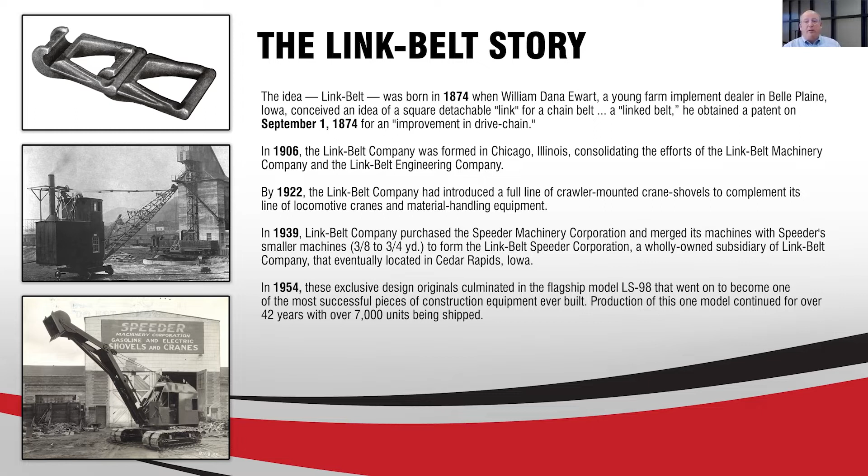But you go to 1962, it's a pretty important date. In '62, Link Belt, headquartered then in Cedar Rapids, Iowa, from Chicago, said, we can't build and ship cranes to the Far East and be competitive. So they sought out a friendly suitor, Sumitomo Heavy Industries in the Far East, a heavy manufacturer, one of the very large companies in Japan, already building ships and some other construction equipment. They signed a marketing engineering agreement: build the Link Belt 98 here in your part of the world, you take care of the Far East, and when you ship one, send us a royalty. And thus the relationship with Link Belt and Sumitomo was forged way back in '62.

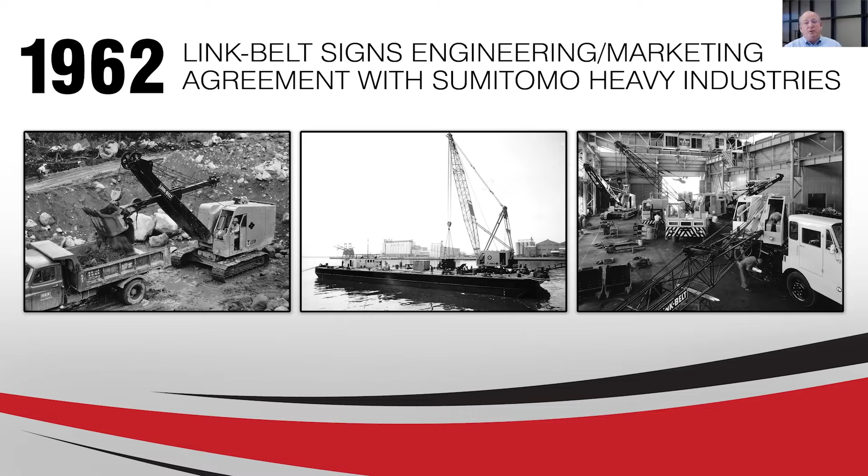That set that - that was for their market. Then in '67, FMC Corporation, a huge conglomerate out of Chicago, bought Link Belt Company lock, stock and barrel, and spun off the construction equipment, the crane part, to form the construction equipment group of FMC. FMC poured a ton of money into the business. We'd already had a plant in Woodstock, Ontario, but they put plants in Milano, Italy, Querétaro, Mexico, Sao Paulo, Brazil, and in '74 came down here, and in '75 opened two plants in Kentucky. It was a huge expansion time for Link Belt, FMC Link Belt.

In 1986, FMC saw that the business was not going to be what it was once planned to be. The construction equipment business was not going to need the capacity they had, so they were going to downsize, and then decided to get out of the whole goods business altogether and sold Link Belt Cranes to that company from '62, Sumitomo. Sumitomo saw the value of Link Belt - we had grown into a good partner, and they bought the Link Belt Construction Equipment Group entirely from FMC.

And ever since then, Sumitomo's basically been our owner, and a good owner they have been. We always say, we don't have to meet quarterly stock meetings or public releases of information. Our owners think in terms of decades - what's good for us for the next 10 years, not the next 10 months. That's really a great way to operate, and makes for a very solid team.

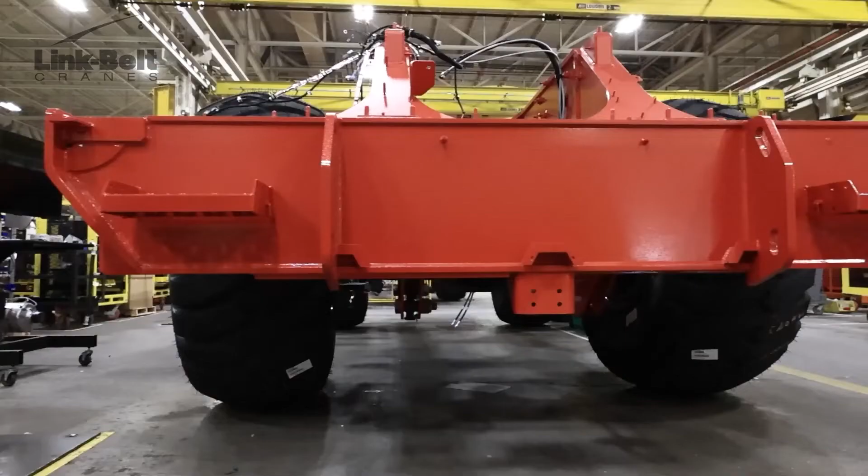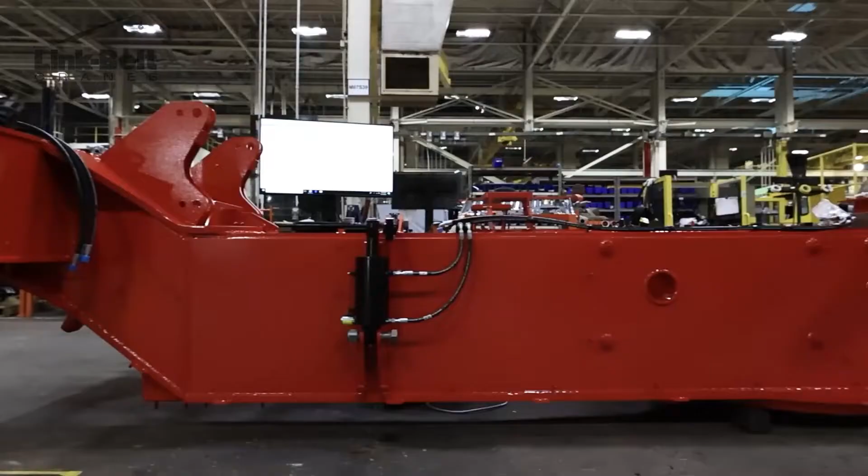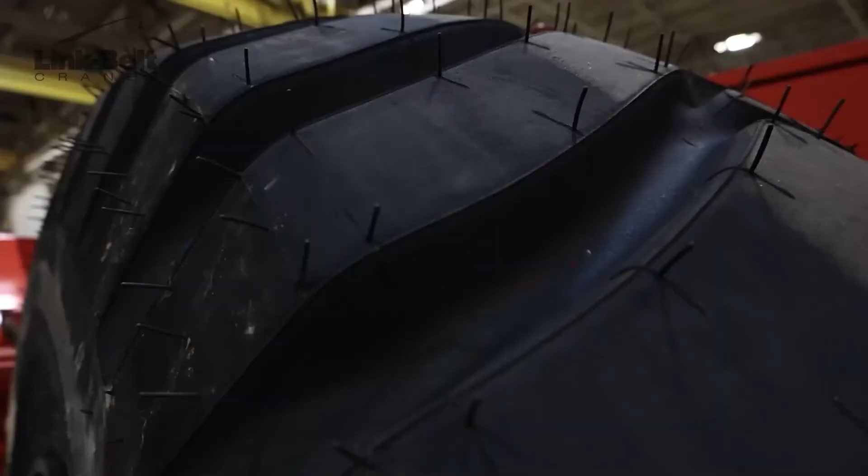We currently offer 7 different models, and 5 of our models are built right here in Bay 7 at our manufacturing facility in Lexington, Kentucky. We incorporate a lot of different safety features, simplicity, and serviceability features in all of our rough terrain cranes. I'm walking through Bay 7, where we manufacture capacities from 65 ton up to 120 ton, primarily rough terrains with 4 wheels. As we walk through the facility, you'll kind of see our generic process where our cranes are going to come in upside down. We're going to put in all of our hydraulics, our electrical, axles, wheels, and then we'll sub everything else up that's going to go into the carrier itself.

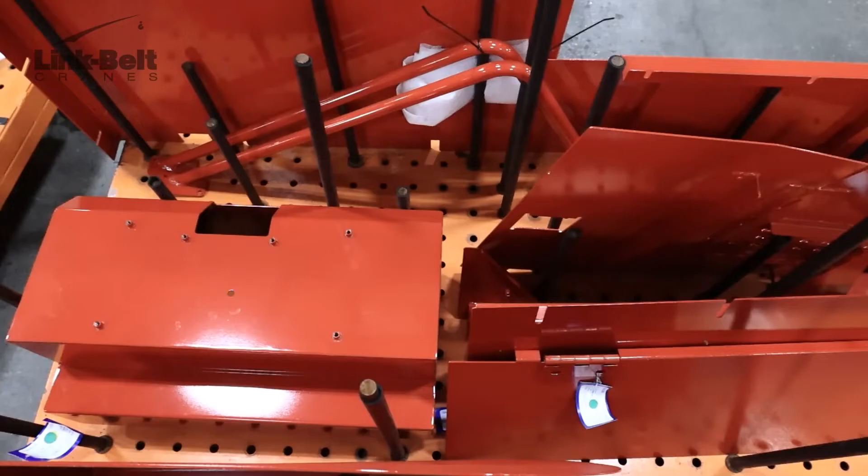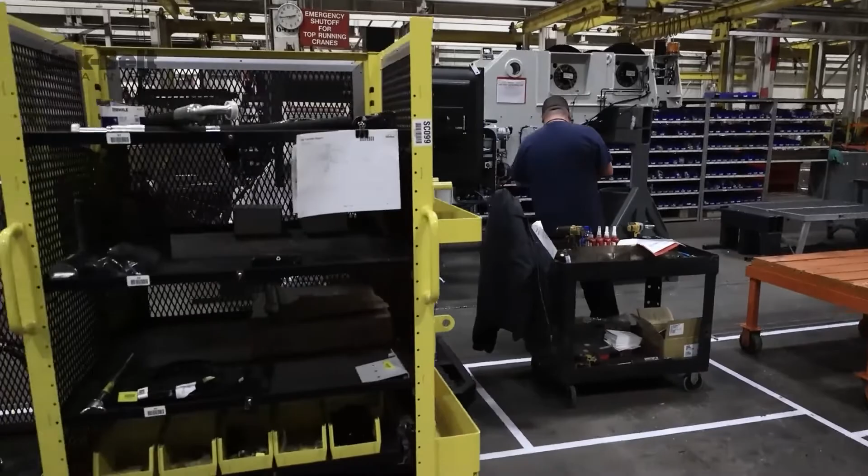Here's where we're subframing up an engine. We'll also sub up our transmissions, our tanks. Here in cell 4 is where we're going to do all of our sheet metal, where we're putting in our ladders, our grab handles, our slip-resistant fenders. We'll continue through our process where we'll take our upper frames, and we'll add in all of our CAN bus systems, our electrical, our winch packages, our lights. All of that will be staged up and be ready for a mounted operator's cab. Once that operator's cab is complete, we'll take it, we'll deck it on the crane itself, prep it up for startup, and then pull it over to get ready to put our booms on it and then take them out to the test pad.

As we continue down our tour here of Bay 7, we're coming across a 100 RT. Now we build 5 models again in this bay, and they're all built pretty much the same way, we just use different components. So we build a 65, a 75, 100, and a 120, and most recently we announced a new 85 RT.

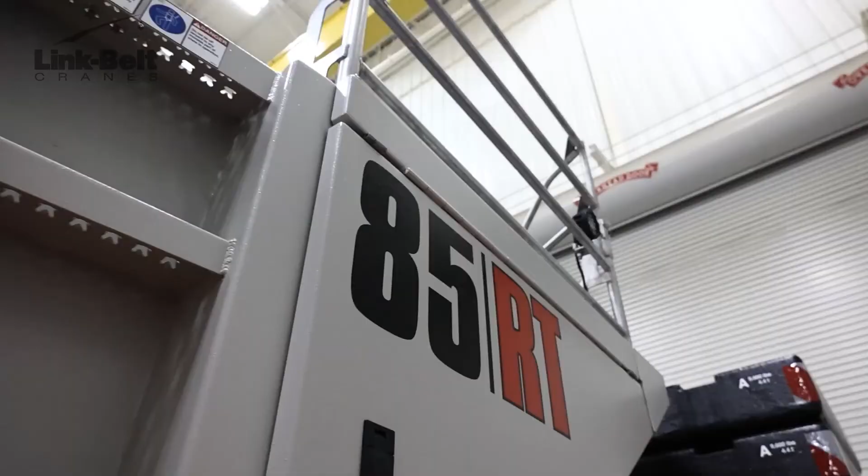Here we're in our final stages of our production process on the 85RT. This crane has had the carrier finished, the upper complete. We've mounted the cab, put it on the boom, and now it's sent it through final paint. These gentlemen are doing its final safety inspections and quality inspections before releasing it to our shipping pad for transport. Now, speaking of transport, our newly designed 85RT will now transport at 105,000 pounds when fully equipped. If we remove our counterweight, we can transport it down to 86,000 pounds, making it one of the most versatile rough terrain cranes on the market.

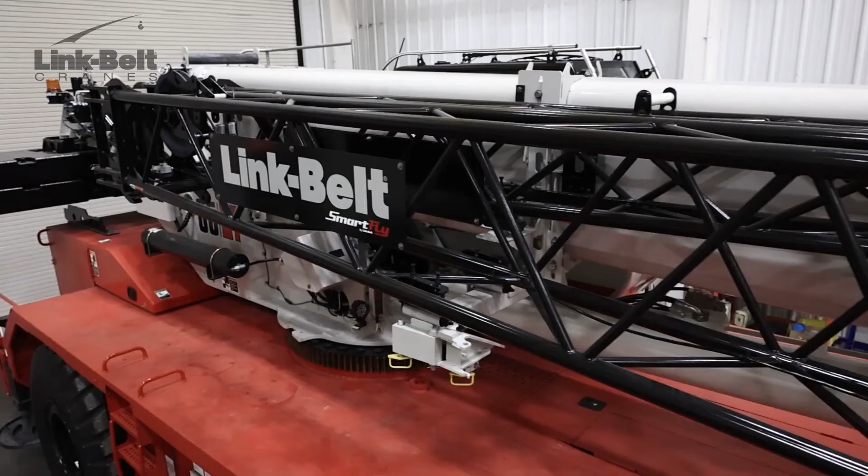The 85RT offers something for everyone. So whether you're a crane rental house in BC or a general contractor in Ontario, this crane offers versatility across the board.

Hello SC&RA members, I'm Andrew Soper. I'm product manager for on-highway product at Link-Belt Cranes. I cover all-terrain cranes, hydraulic truck cranes, and today I'm going to walk you through what we call Bay 14. This is our dedicated production bay for all-terrain cranes. If you didn't know, we've been producing Link-Belt ATs in Lexington since 2012 with the introduction of the ATC 3275. We have 3 models in the product line: the 275 ton, the ATC 3210, and the new 175 AT.

I'm going to walk you through how our process works here, and how we get from piece parts and sub-assemblies to a main finished crane.

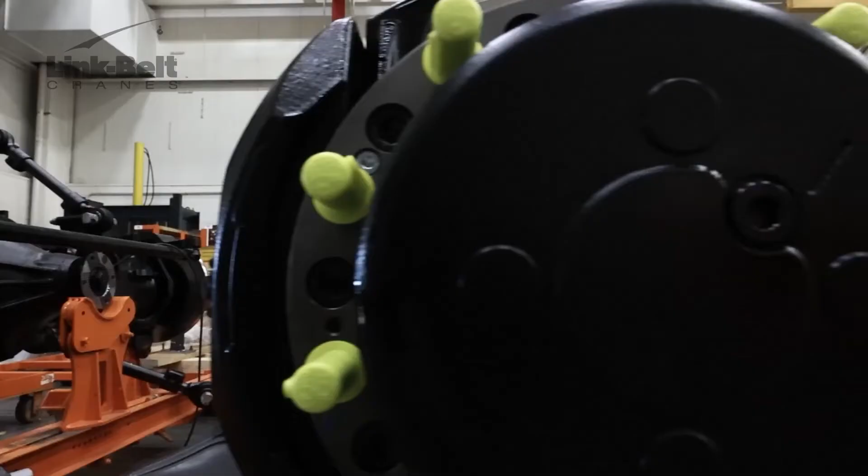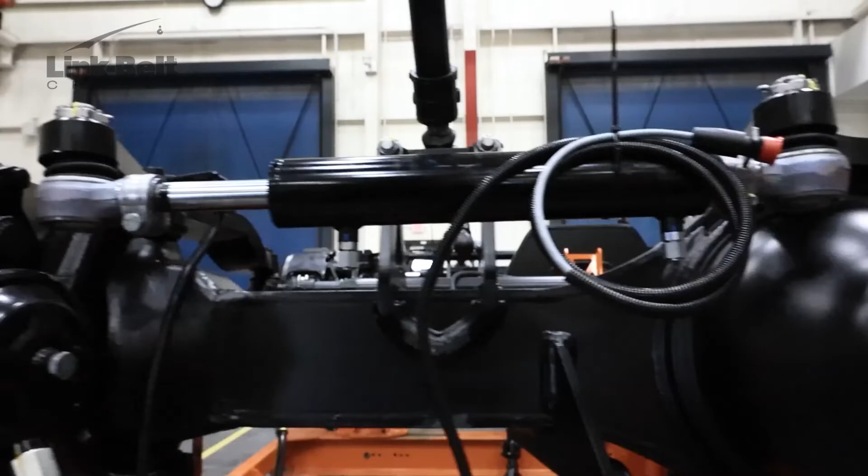On the left-hand side of the bay, we're doing some of our major sub-assemblies. You can see the axles going together here. These are axles for a 3275, Kessler axles. We have these models in 10x6. Our 175 AT is a 10x8 system.

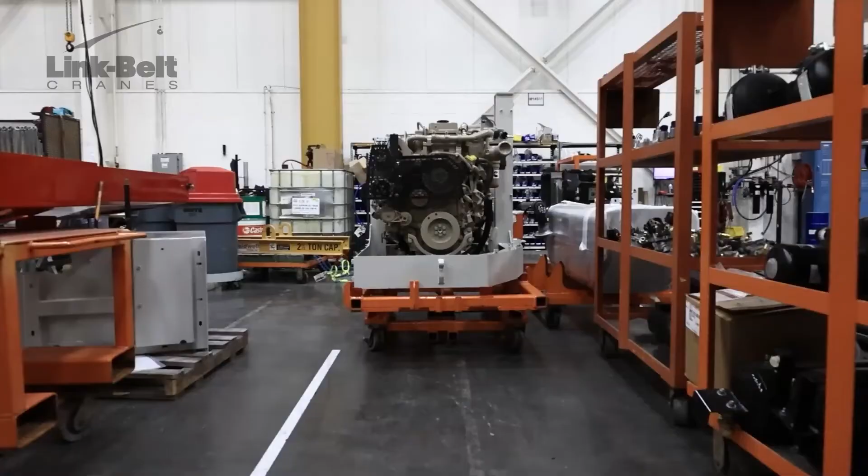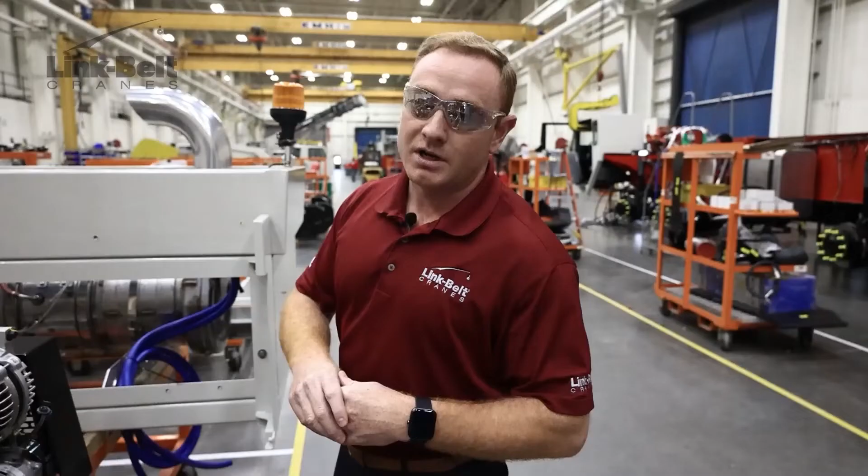We're also doing engine sub-assemblies, engine transmission, engine powertrain. Here you can see an upper engine for an ATC 3275. This is a QSB Tier 4 Final off-highway engine from Cummins. Like the rest of the Link-Belt product, we are Cummins power across the board. Cummins has one of the best service support networks in the engine business, so we're very proud to have them as a partner.

We have two different platforms for our all-terrain cranes. We have a two-engine platform with our 210 and 275. We have a single-engine platform with the new 175 AT. So we've got that going.

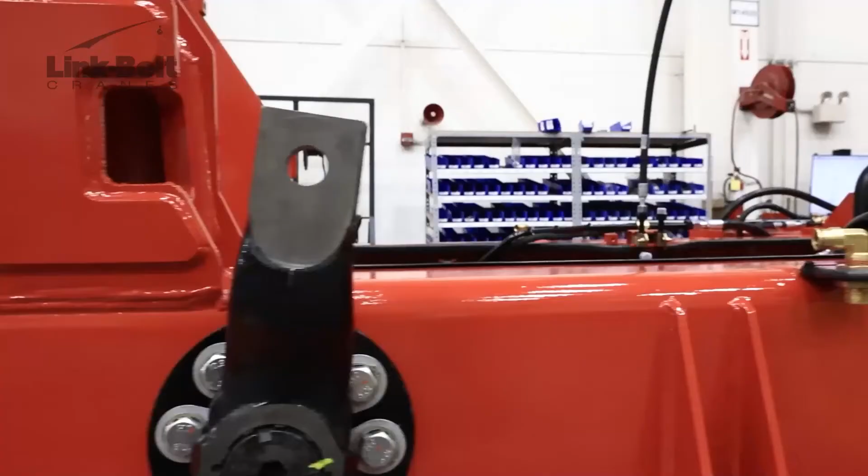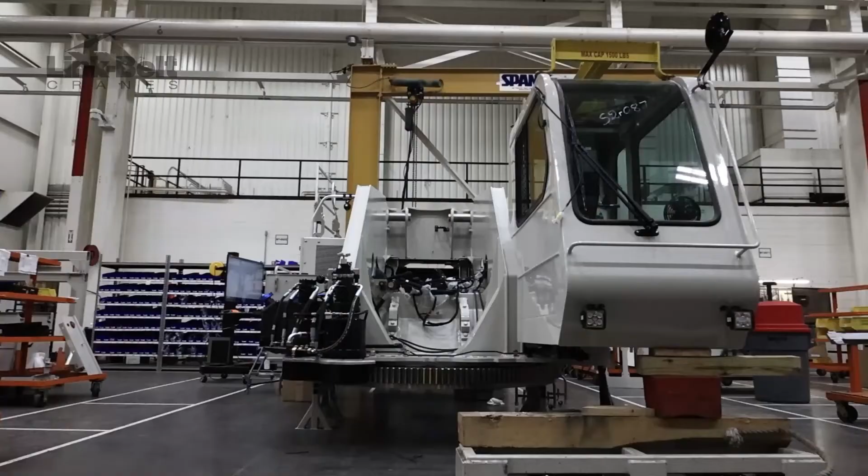On the right-hand side of our bay, you see the carrier frame of an ATC 3210. Your chassis continue down the right-hand side of the bay. On the left-hand side, we have our upper assemblies being stall built. They'll build the entire upper assembly from the turntable bearing up - bearing, upper frame, hydraulics, winch, engine if it has it, upper cab. He's installing the upper cab and main upper wire harness now. So we've got one machine about 75% complete here.

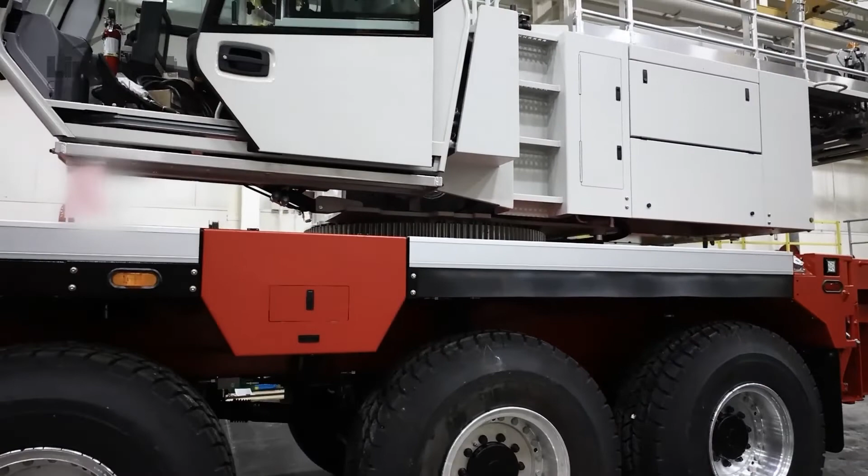This is a 175 AT, our newest model, a single engine platform like I said. It's got all the bells and whistles of any all-terrain crane on the market. Some of the new stuff we've introduced and innovated on is tire pressure and temperature monitoring, which comes as a standard feature, and real-time ground-bearing pressure on your outrigger jacks and beams.

We also introduced this new dual occupancy carrier cab. It's got all the creature comforts that any over-the-road truck's going to have, or some that you're going to find in your commercial vehicle.

Okay, SC&RA members, you've seen our ATC product. Now I'm going to show you what we're best known for - that's our hydraulic truck cranes.

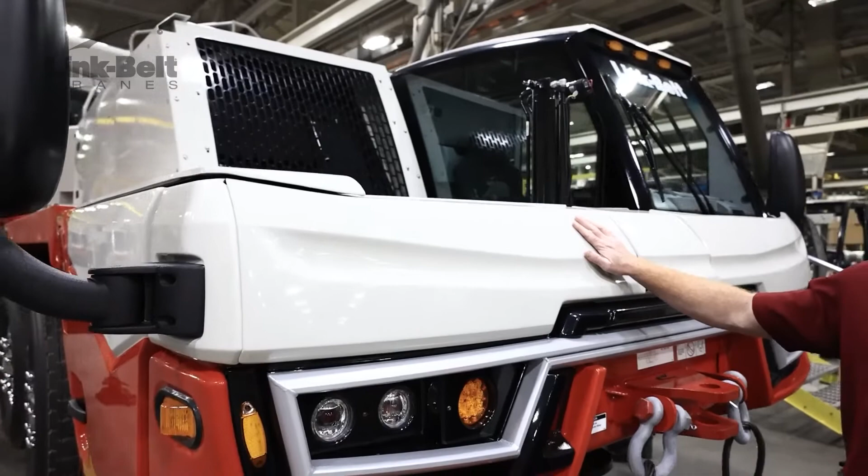This is the newest model in the fleet. We just introduced it at Crane Fest 21. This is the 120 HT, a totally redesigned truck crane from the ground up. It's got an all-new carrier frame, all new suspension, axles, everything.

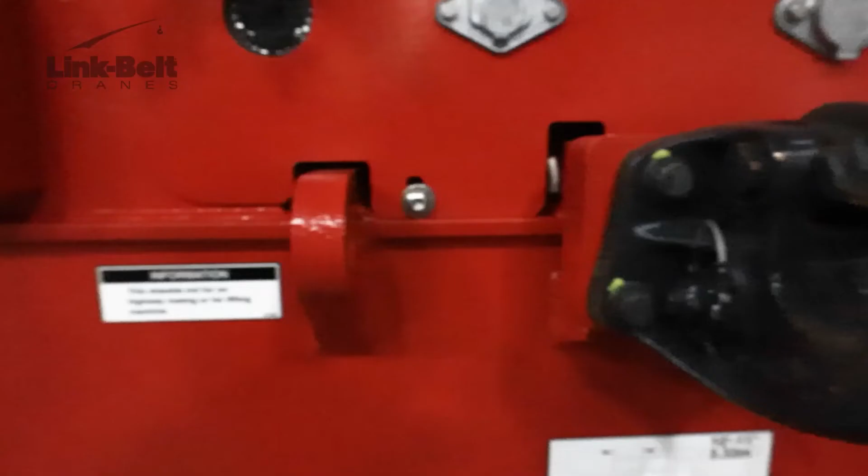It's got some of the bells and whistles that you're going to get with your ATCs, like tire pressure and temperature monitoring. You get V-Calc along with the Pulse 2.0. This vehicle is going to transport efficiently in a boom-over-the-front configuration, where you can carry up to 20,000 pounds of counterweight. It's also going to transport efficiently in dolly, where you can carry up to 36,000 pounds of counterweight.

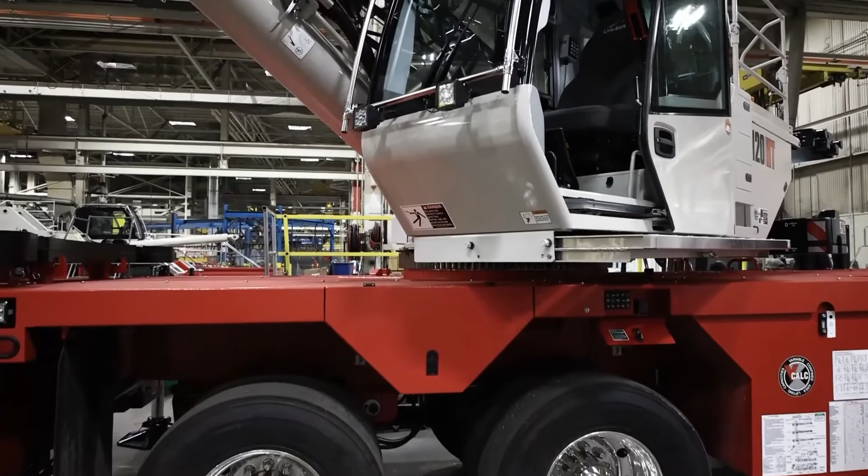In a lot of applications, there's a long drive time, and then the operator's got to get out of the chassis and into the upper to operate the crane. So we try to minimize driver fatigue by making it a comfortable ride. You've got an air ride seat, air ride mounted cab, lumbar support in the cabs as well for the operator's seat. It's all about comfort for the operator.

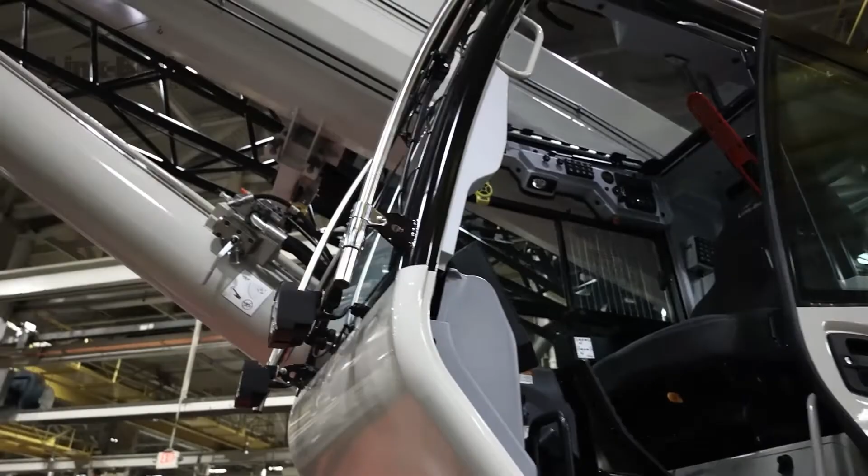To recap the new features on the 120 HT: you've got a new carrier cab, new suspension, new axles with higher rating, and improved ride quality. On the upper, you've got the SmartFly, the patented Link-Belt SmartFly, integrated on here. You have a new operator's cab with Pulse 2.0, and our counterweight detection system, what we call our Smart Stack system.

We're going to walk down the rest of Bay 8 here. This is where we produce our truck cranes. On my left hand, you have an HTC 86-100, still going strong for Link-Belt, very popular crane. On the right-hand side, we have an HTC 86-75 Series 2. It's been around about 15 years, very, very popular crane for us.

And then here, this is a T2, the HTC 86-110. We introduced this crane at Crane Fest 2015. It's been the market-leading truck crane since its introduction at that time frame.

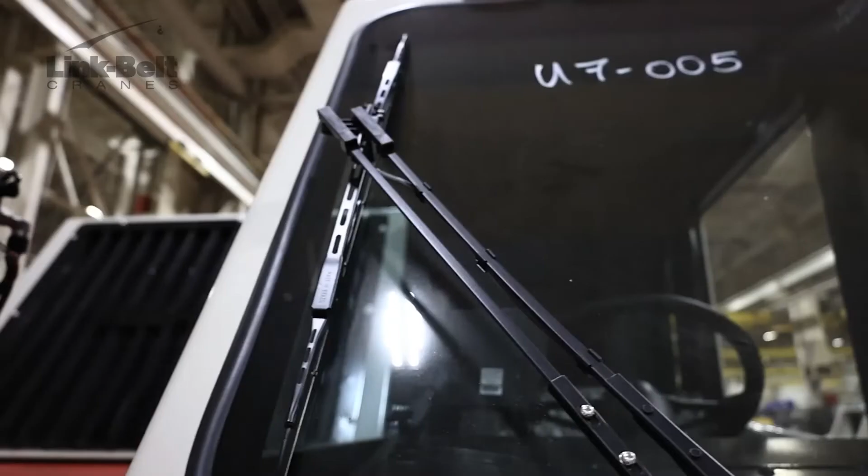This is the 65 HT. This is about halfway through production - this is the chassis, built up waiting for an upper. This is the replacement model to the HTC 8660 Series 2. We've put a longer formed boom attachment on it. It's got improved capacities, increased counterweight payload, higher maximum counterweight, and an improved chart relative to its predecessor.

That's our on-highway product for you. Thanks for coming along.

Hello, I'm Kelly Feaster, product manager for telescopic crawlers and lattice cranes here at Link Belt. And I'm here in Bay 9, which is our telescopic crawler bay. We're going to talk a little bit about the product line and what's going on here in the bay today.

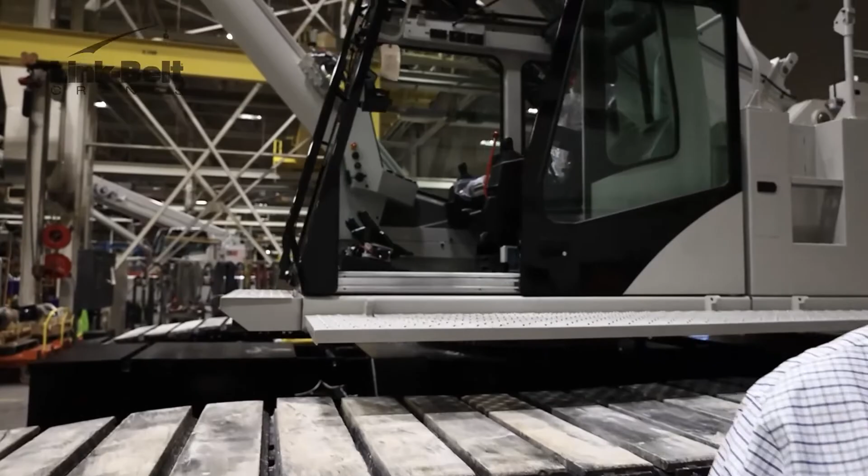This crane behind me is our TCC 800, or 80-ton telescopic crawler crane. This TCC 800 has 120 feet of full power boom, moves in basically 2 loads, goes together, completely self-assembles, goes together very quickly. Off the truck to operating time is very quick.

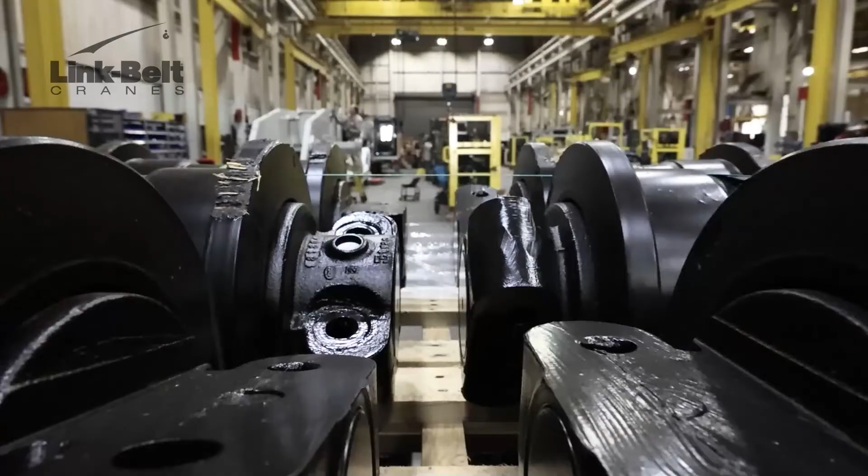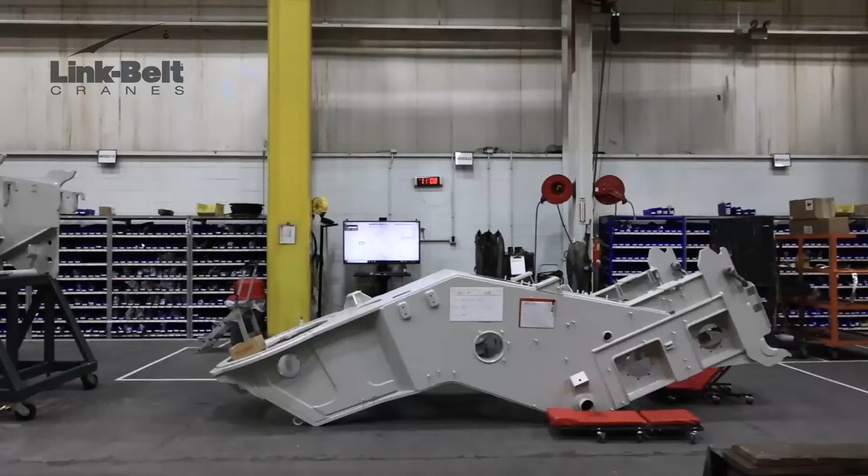Okay, so we're here in the center of Bay 9 where the telescopic crawler cranes are built. Today our product line goes from the TCC 550 at 55 tons all the way up to our TCC 2500 at 250 tons. As we walk through the bay, you can see a difference between this bay and what you saw with the rough terrain crane bay and the truck bay, in that these pieces are more stall built as opposed to moving down a traditional assembly line.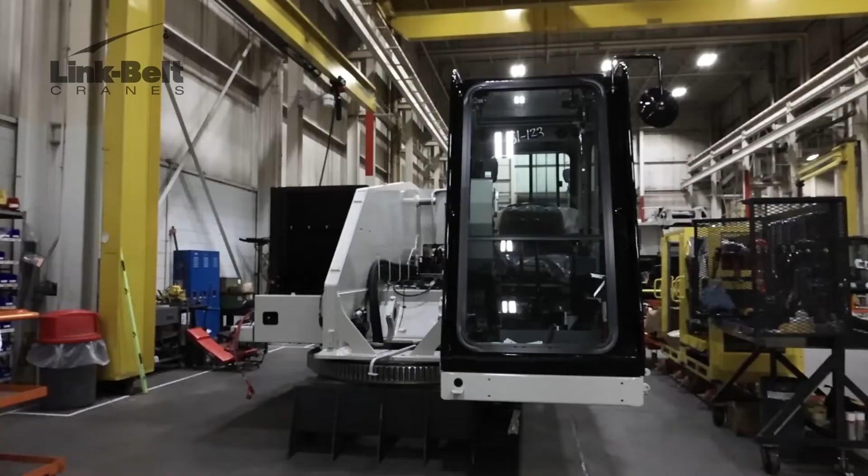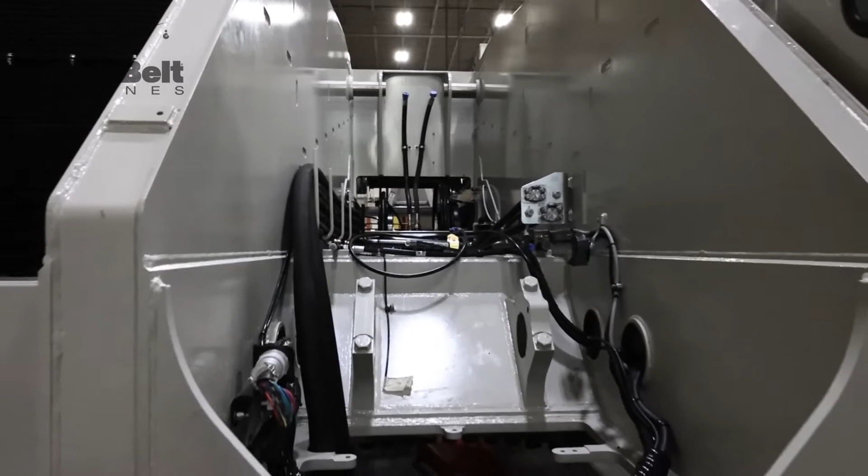So we're looking at the upper for a TCC 1200 here. It comes in, gets turned upside down. They do all the lower componentry first, just like with the other bays, and then they'll pick it up with the overhead crane and fly it over to where the lower is already being assembled, and assemble it there at the location of the lower.

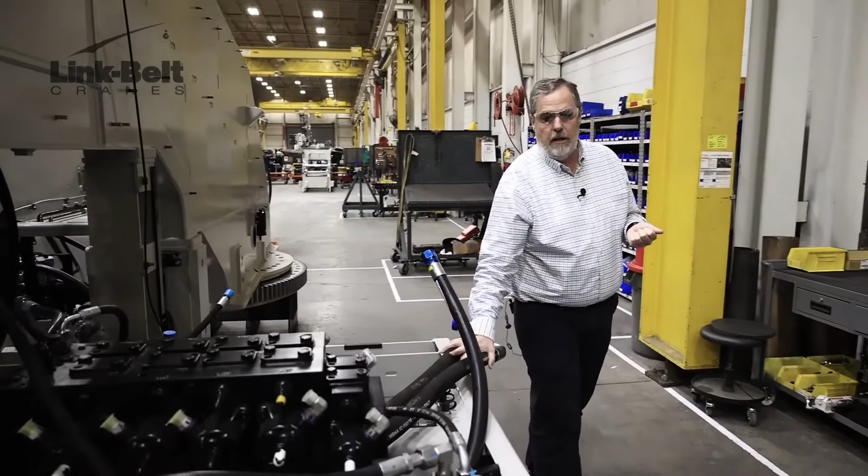Please notice everything is finished painted. We pre-paint everything on these cranes just like we do with the rough terrains and the trucks. We use hard hose everywhere we possibly can, unless there's something that causes vibration, and then we have to use a flex hose to limit vibration.

As we move on down through here, we see some other componentry sitting around, piece parts for the next build, but the thing I want to show you is just ahead of us, and that is the next TCC 2500 being built. This crane, as you can see, is a step ahead of what we just saw with the 1200. The lower is finished, the lower componentry is done, the upper componentry is done.

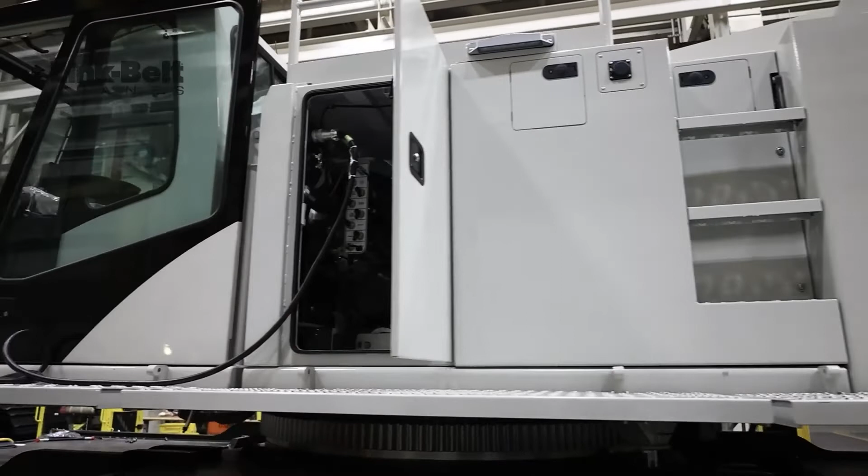This crane has been decked. The car body counterweight has been installed on this crane. You see with the 2500 we have hook and pin side frames just like we do with our large lattice crawler cranes. The 298, the 348 all have hook and pin side frames that work exactly the same as the TCC 2500. So this crane is in a condition to where it's ready to accept its boom.

We're getting ready to boom this crane. The side frames, the crawler frames are finished, and they're ready to be installed, and that'll be the next step for this crane.

Okay, so here we are at the beginning of the lattice bay. This is where we manufacture and assemble our lattice for all of our crawler cranes in the product line today. These racks behind me house the lattice and the chord tubing that we use to make the boom sections.

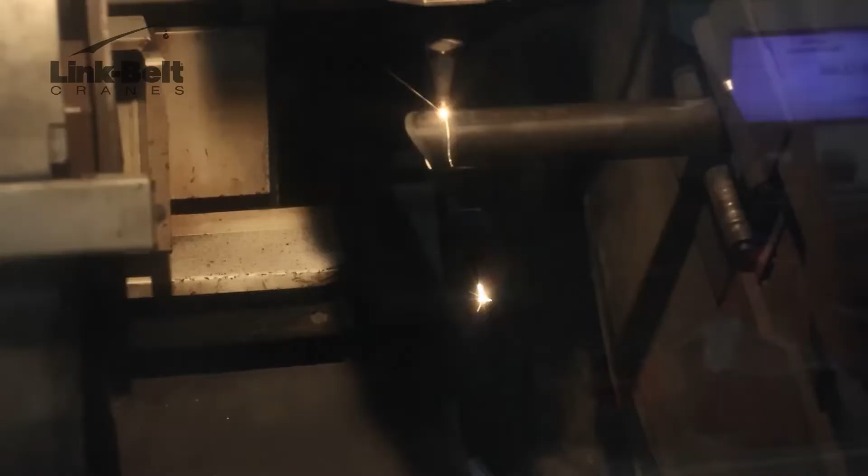As we move forward, we use a laser to cut our tubing for our lattice, and you can see how it cuts the tube at an angle. So it cuts the lattice at the right angle, and it copes the lattice perfectly. So when we actually assemble the lattice onto the chord tube, there's no cleanup necessary. We can just put it on and weld it in position.

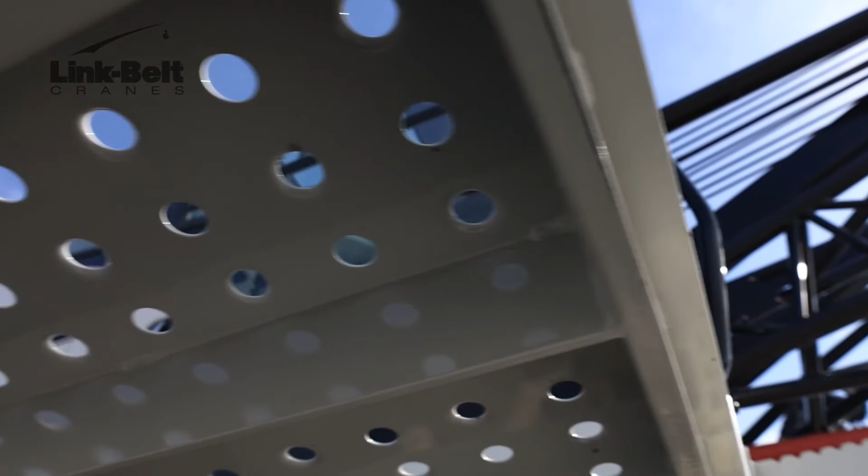Here we are out on the shipping pad at Link-Belt. It just so happens that we have a 218 HSL here that's getting ready to ship out to the customer. We wanted to take this time to talk about our lattice product line. Some things about the product line you may not know: we import the uppers and the lowers from our sister company HSC, and we build all of the lattice boom and the live masts here. The other thing about these cranes is they are all Cummins powered cranes, and those are North American sourced Cummins.

We talk about the product line today. We go from 80 tons with our 138 HSL all the way up to 300 tons with our 348 Series 2. And this crane, the 218, is 110 tons. Great thing about these cranes, they transport best in class as far as transportation.

Self-assembly, they're all designed to self-assemble. This crane here, as far as serviceability, the lower is sealed. There's grease zerks on the turntable. The head machinery is all sealed, the bridle and the bail sealed, so very little daily maintenance for these cranes. So the cranes can go to work and go from shift to shift with very little downtime due to maintenance. That goes for the whole of the lattice product line.

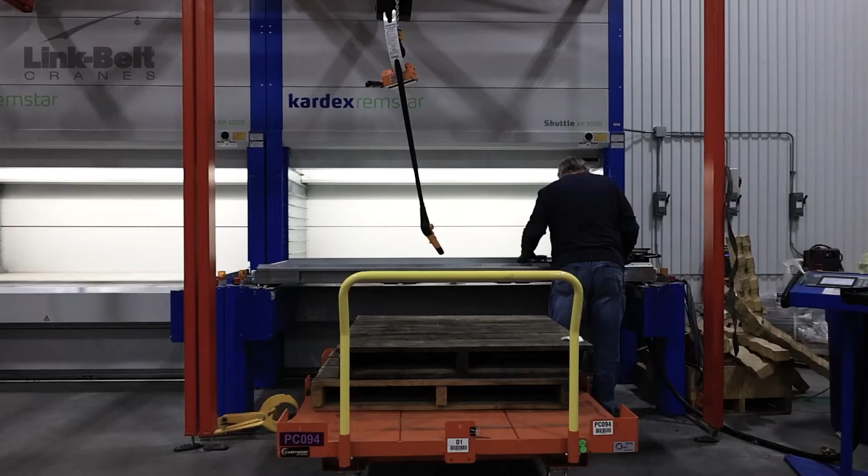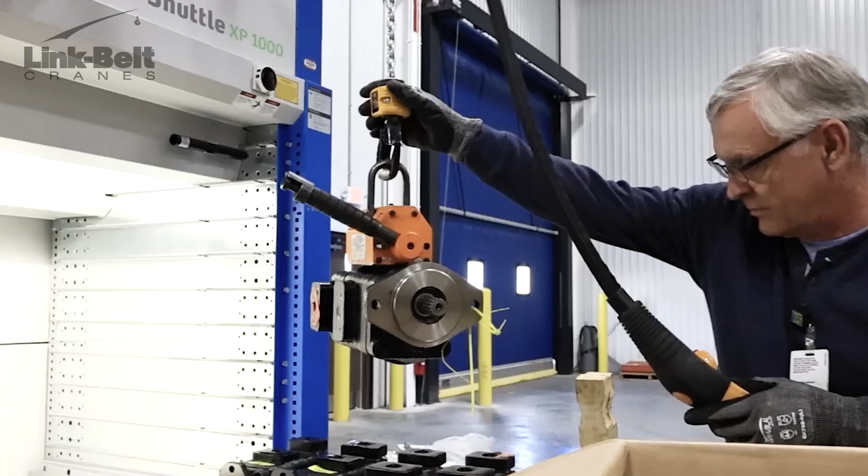This distribution center was opened in '94, and we separated our group into a separate parts center so we could control our orders and our inventory better. All of the orders come in online from our distributors, and then we process them. They go out into the warehouse where they are picked, packed, and pulled and shipped to our customers all over the world.

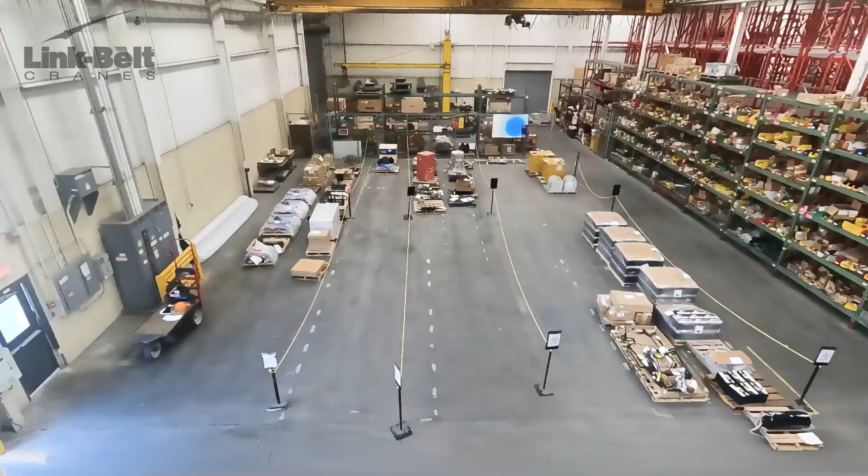So in 2020, we made the decision we were going to expand our warehouse. Right after ConExpo, we broke ground on a brand new warehouse that will house all of our production parts. In the meantime, we also changed how we did things in the existing warehouse. One of the first things we did was consolidate all of our receiving into these 3 doors. Now everything that comes in, whether it's for production or service parts, comes through these 3 doors. They're then brought over to locating lanes where they're located throughout our warehouse depending on whether they're going to production or service parts to be shipped out to our customers.

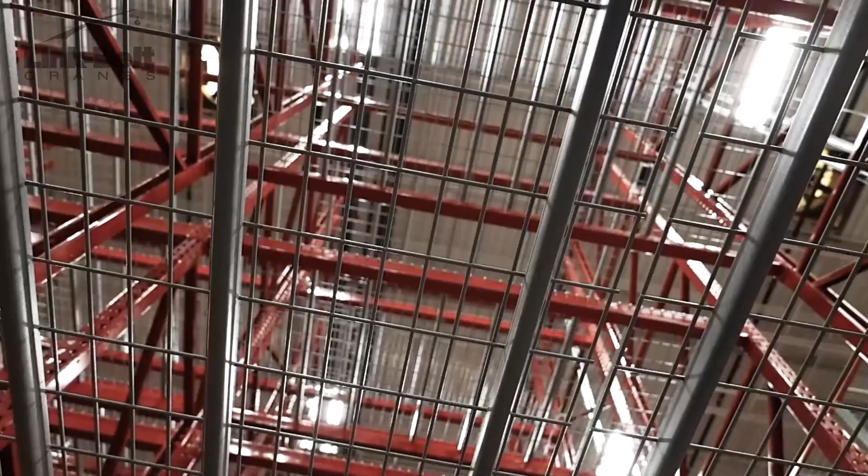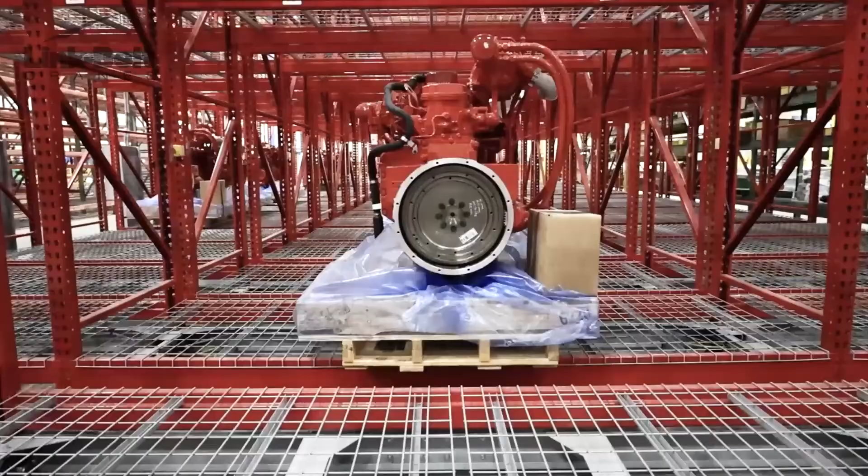One of the things we did was remove our old stationary racks, and we've installed these new safe racks which travel along tracks and more than triple our rack capacity in this area of our warehouse.

All of the service parts have been consolidated down to this end of the warehouse in these racks, so it goes right from the racks straight to the service parts shipping area. We have our wood shop down there where we can build any crate, and then we've got our UPS workstations and our FedEx workstations so that everything small pack can be shipped out of here.

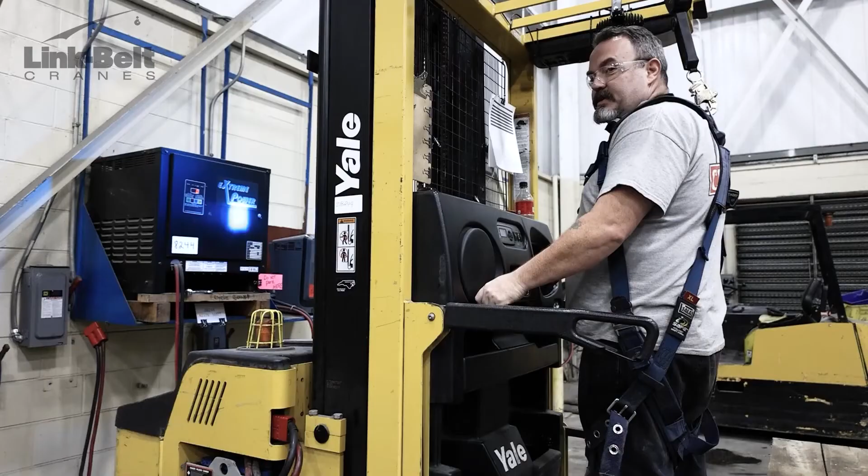Here you can see the charging stations for one of our electronic pickers. These pickers then go between all of the aisles, and they take each shop order or each service order, go through the aisles, pick out the parts, and get them ready for shipment. So now we're going to walk into one of the entrances into the new warehouse.

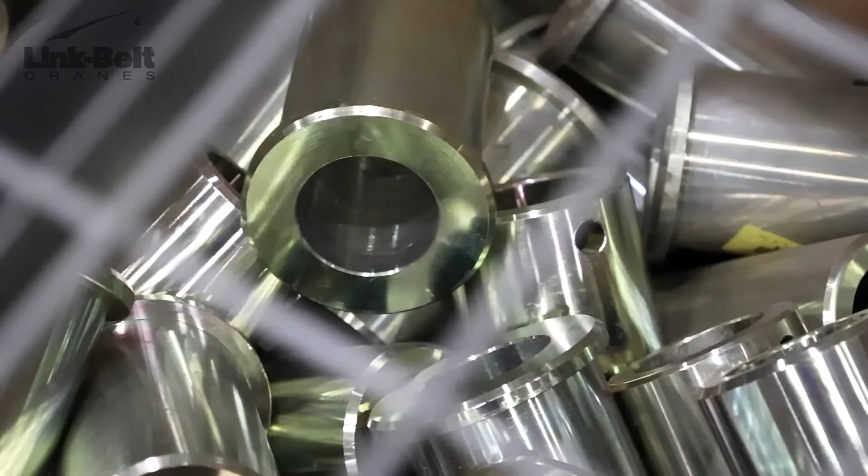We've got our new racking system for all of our cylinders. All of our boom hoist and telescope cylinders will be stored on these racks. We've also got all of the new parts storage for the hoses and the tubes. We have 15,000 square feet of storage for hoses, and 140,000 square feet of rack space in here.

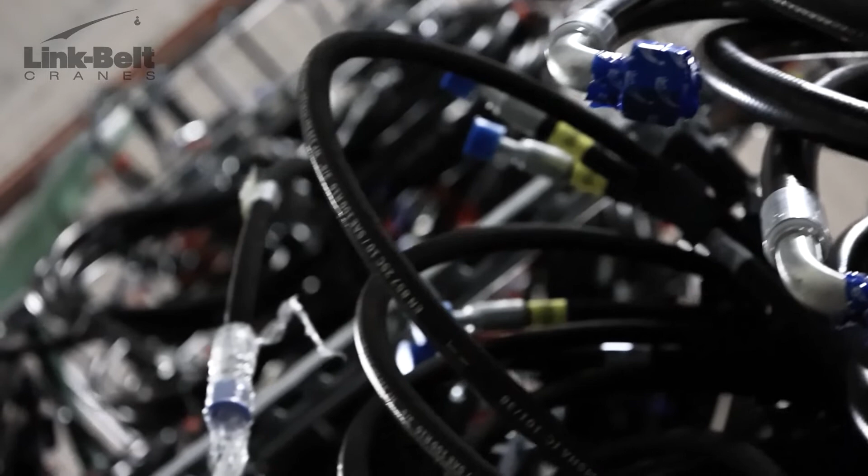We've got all of the hoses and tubes on this side of the warehouse because these are the first components we'd need to assemble onto the machines. They're located so that as we go to assemble the machines, we'll work our way down the warehouse into the larger components. As you walk through here, you can see the tubing comes in all different shapes and sizes, and we've got these custom racks built for us to store all of these tubes.

We've got two identical Kardex machines. This one in the new warehouse will hold 14,000 square feet of parts, and the one in the old warehouse will hold 14,000 square feet of parts. You can see the parts have been brought over from the locating lanes. They've got the yellow tags on them, the barcodes, and then they're brought over and put into the Kardex.

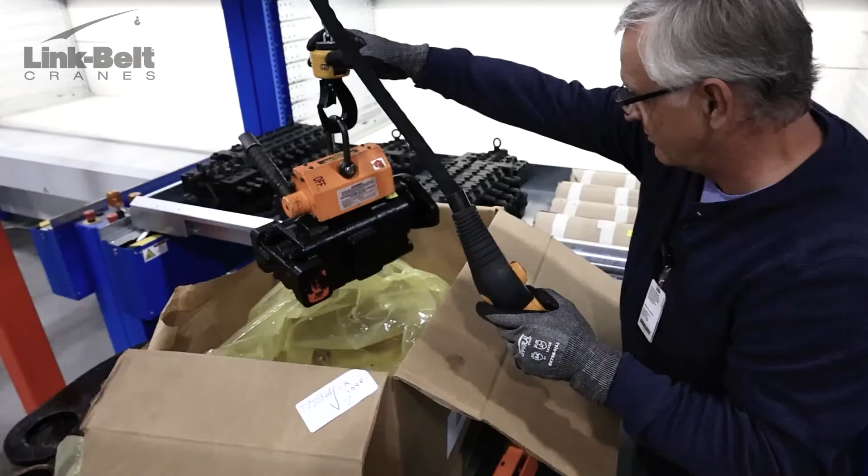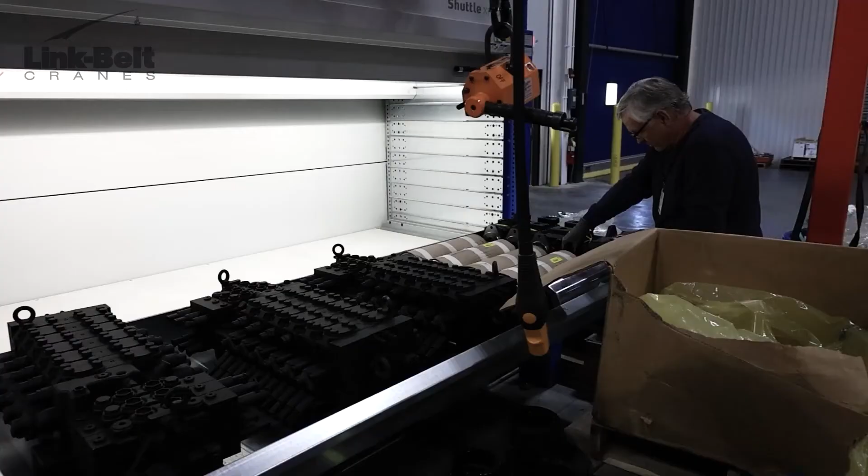Now the difference with this Kardex is it also has two heavy trays. Normally in a Kardex you'd only be able to put very small and light parts, but this Kardex will hold, each tray will hold up to 2,200 pounds, which is a metric ton.

So as you've seen throughout this warehouse expansion, we've made a large capital investment to ensure our customers have the best service and support that we can possibly give them. We understand that getting our customers up and running in a timely manner is critical to their bottom lines. And Link-Belt wants to do everything we can to be at the forefront of the industry to make sure we are the leader in service and support.

Thanks, Troy. I just recall that puts us at 132,000 total warehouse space out there for product support parts. So thank you very much.

So we talked about the product, we talked about the support side. Gary told you about service reps available to support our dealers, the parts we use to support our distribution. Now I'll take you to another side of the business, which is a big and growing part. That encompasses what we call Preferred, which is for crane owners as far as access to our e-library and all the tools available through our internet services. So I'm going to introduce you to Bruce Cablin, who manages that for us. Hi Bruce, take it away.

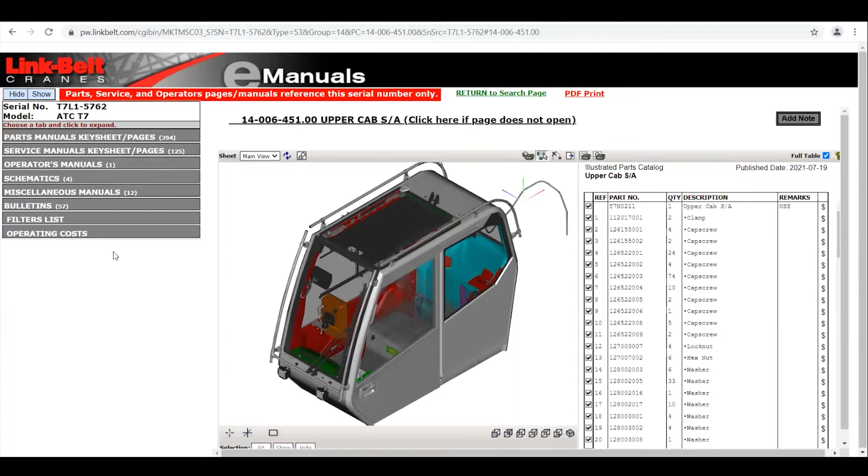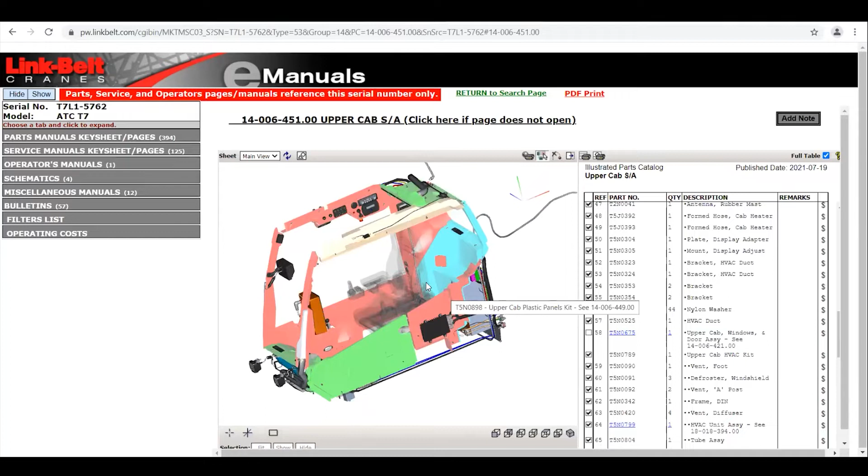One of the things that we've improved on in the past probably 10 years is this 3D rendering that you're seeing right now. So now all of our newer cranes have this 3D representation of a parts page. That's pretty cool. And then the cooler part of this is I can scroll down and I can actually take that door off. And now you see the internal components of that crane. And then when I'm hovering over a particular part, these are getting highlighted as far as what that part is. We could go into a lot more detail if I had more time to do that. Obviously, I don't today. But we think a lot of the aeronautics industry uses this. We're probably the only crane company that gets to this kind of detail with 3D rendering on our parts pages.

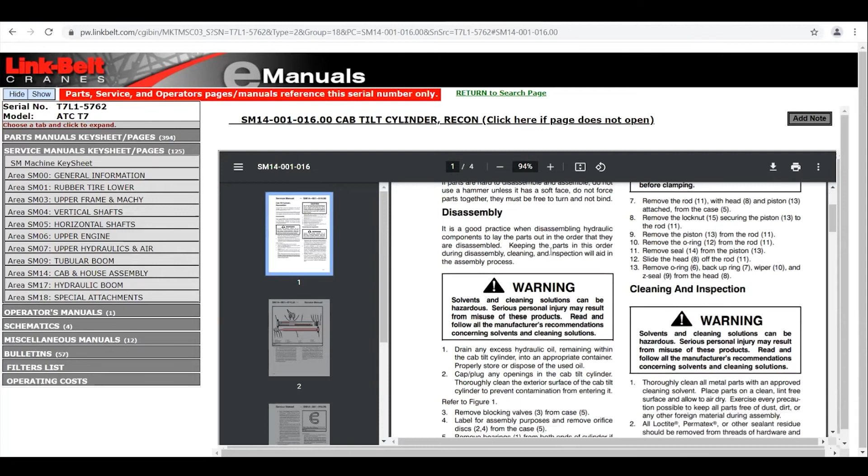Go to our service page, it's very similar to what we're just showing. We'll go back to another cab assembly area and just look at a particular unit that we're going to be looking at. Go back to the cab house again, and you'll see just a service page that tells you how to recondition that cab tilt cylinder. And you'll see some of that 3D drawings in here as well to kind of launch off of our other engineering documentation, so we can use this as well inside of that.

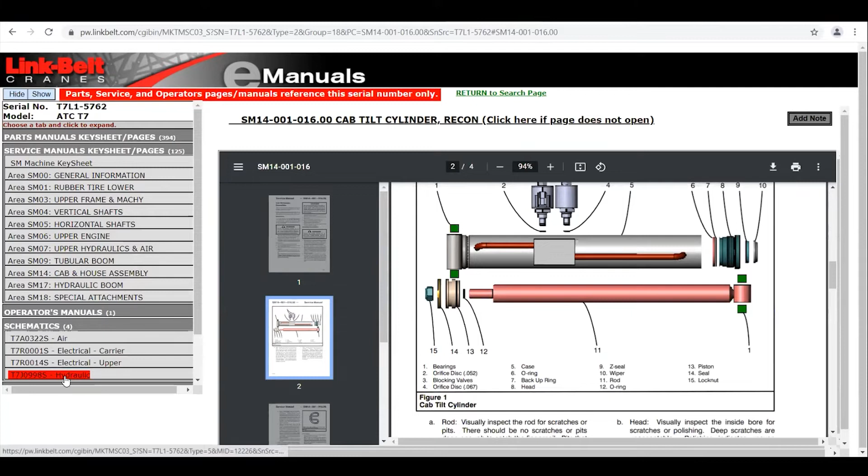Operator's manuals are just that for this particular crane. One of the big things that we've seen as a positive for our service team are the schematics. You can go directly into this particular serial number. The schematics for that particular serial number are listed here. Some have air, electrical, and hydraulic like this one. We'll just look at a hydraulic schematic. Too many times that gets lost in the shop and you've got a dirty copy.

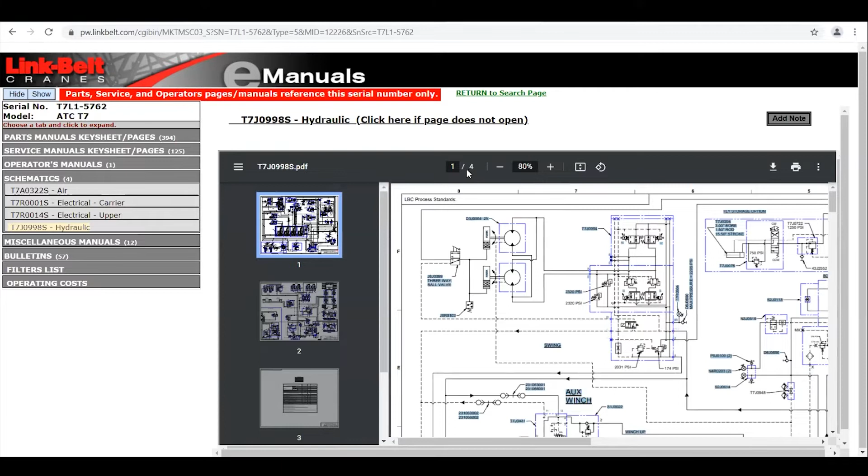So where can I get to my schematics? You used to have to order that from the manufacturer. Now it's right at your fingertips. You can blow that PDF up and print it on a wide printer if you needed to, and then you'd have a clean copy of that immediately. So that's basically a real quick rendition of our Link-Belt Preferred eManual site.

We're going to take you into another piece here. If I can get back to where I need to go. Under the gun there a little bit. Let me go back to here. I think, Pat, I've got too many windows going on. I can't see everything I need to see.

Yeah, having access to the shop manual, Bruce, you know, if you're out there, you're watching the clock, you're worried, it's an older crane, whether it's new or old, the old books are also available to you. And you can print out portions of that or all of it. So, and all of that is at no charge. So I think that's a huge plus for customers to be able to get answers.

Yeah, Pat helped me out there as I was getting a problem with my control here.

So I'm going to log back in and show you some of the stuff he was just talking about. This is how the end user would actually log in. They'd have a username and password, go to the site, and it would take them to the home page that I started from, hopefully.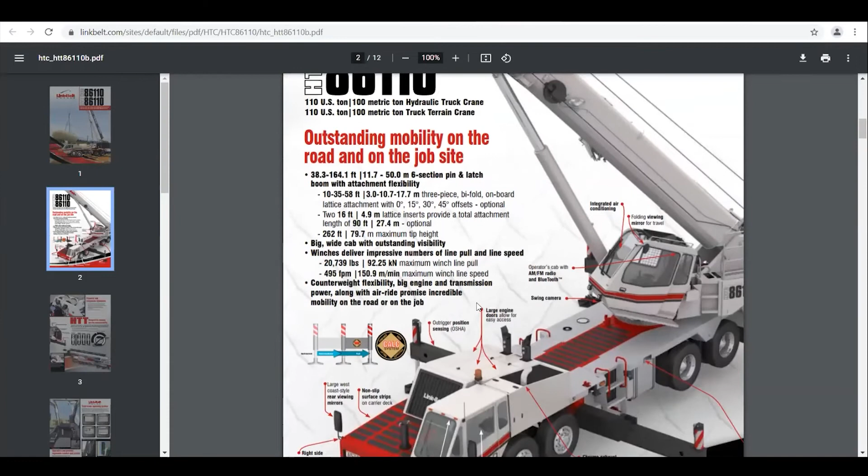We got news about what's going on, the 85 RT that Brian talked about earlier. If you want new product information, you can find it from our site as well. If you go into a telescopic truck, looking for literature for an 86-110 that Andrew talked about, there's the brochure. Very quickly you can see that information, the same thing we use to actually print our brochures from. So you have a nice PDF that, if you have a color printer and need that quickly, you can get to pretty readily.

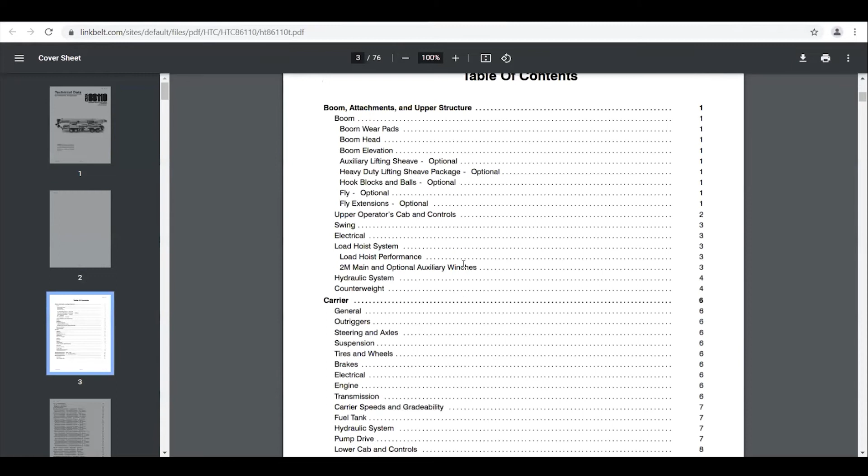Beyond that, go back and you can see our technical data, which is more specifics about capacity, specifications, particular cranes. So again, literature at your fingertips. Back in the old days when Pat and I started, you'd have to order this, and maybe a week later you'd actually get the thing you were looking for.

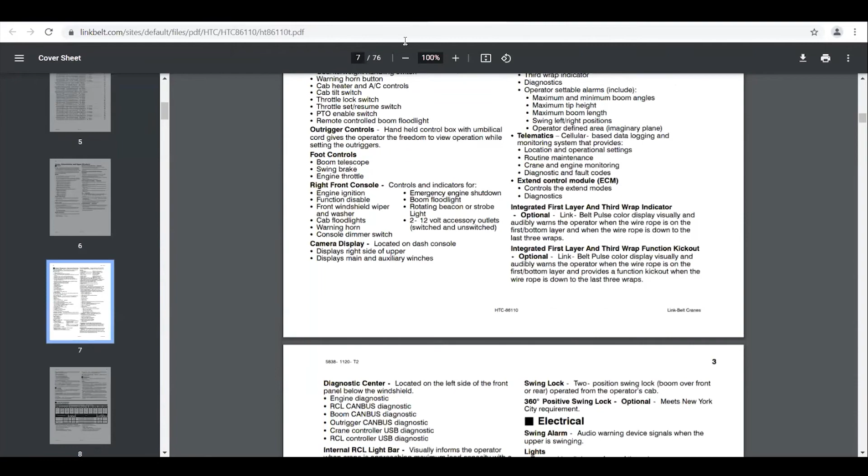There's a section on here back on the crane site. If you wanted to see particular literature for an older crane, go back to crane zone - I'm going to navigate incorrectly, so I'll show you that later. But there's also literature there for older cranes that date back 60 years. We've been around a long time, and we don't orphan anything from a parts perspective or a brochure perspective. All that's on this site as well.

Two of the newer things Pat wanted me to touch on are two websites. One of those being iCraneTrax, our telematics site that we partner on with A1A Software. This is an RT crane located up in New York City. It has a telematics unit on it, so it'll show you the summary of engine hours, how much fuel has been used for a particular time frame. We also have an interactive dashboard that shows you that.

Timed out, let me get back there. Gee whiz, Pat, sorry about this. But you got a dashboard that would actually show you the use of that particular crane and give you the instant dash so you'd see what was going on.

So we've had this going on since 2000, I think 2014 maybe, when we introduced this. We've kind of checked the boxes as far as telematics goes throughout our whole product line. Again, we partnered with A1A Software out of Jacksonville, Florida, who've done this portal for us, and they were also very instrumental in creating our 3D lift plan software that I can show you quickly, hopefully.

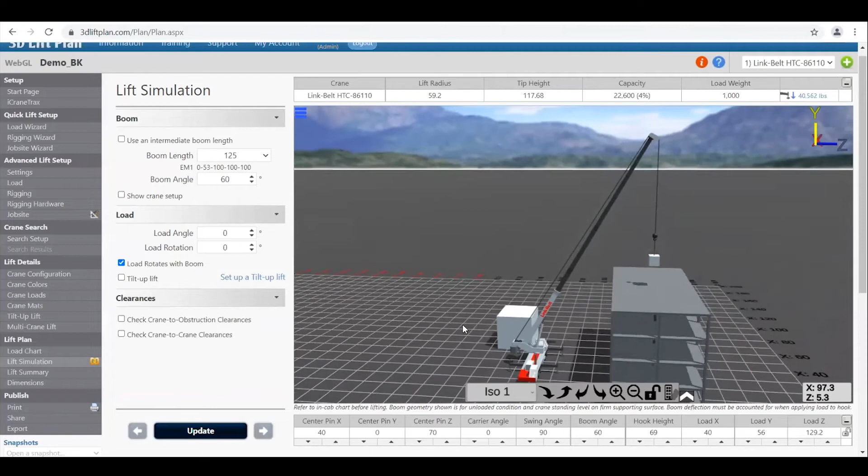As I said before, I usually go through this in about an hour and a half, and I've done it in about 12 minutes. So I'm going to turn it back over to Pat at this point and handle some questions with him and Claire.

Thanks, Bruce. As you said, that's all at no charge to Link-Belt crane owners - 3D lift plan, as well as access through the preferred platform. So a lot of answers available and more to come. That's a quick run through, Claire, on this end. We didn't cover everything, but if you want to know more, you might have to come to Lexington.

Okay, so let's do that. You know you're always invited here, and we look forward to getting together with you up there next year at our annual meeting. I hope that's on. Oh, absolutely, we are scheduled to go forward with the live event, Pat, and thank you so much.

You know, this webinar series that we launched this year due to COVID has taught me so much. As you know, I don't come from the crane industry. I'm an association executive, and I have learned, and I am constantly in awe not only of the quality of the products and the learning curve going through each of the manufacturers, but especially today, the advancement in technology, graphics, even the material that you make available to your clients.